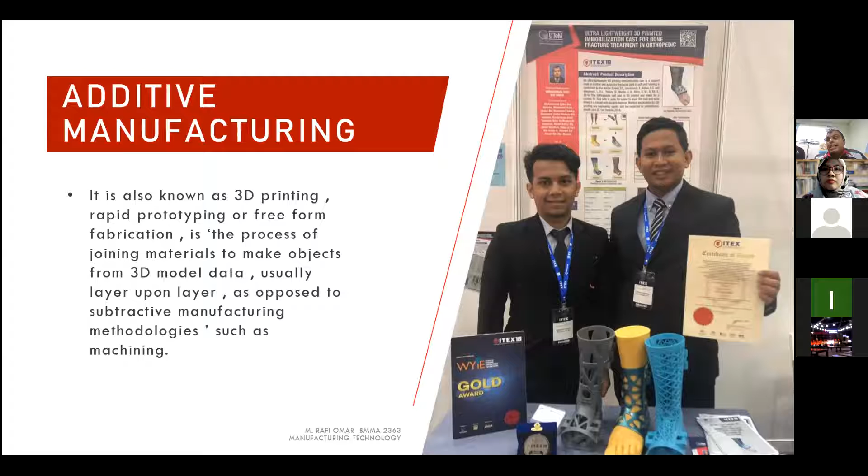At least... Okay, for example, on the right side, this one is actually my student's final year project, which did 3D printing and joined a competition. This product was actually made for a bone fracture to support the arm. This product was actually made from a 3D printer. Which type of 3D printer? Maybe by the end of this class, you'll be able to identify which type of 3D printer my student used. Okay, alright.

Okay, next, the important thing before you go deep into 3D printer is you need to know the definition. As Puan Rohayu said before, rapid prototyping is different from additive manufacturing. However, it is in the same group.

Okay, additive manufacturing. What is the meaning of additive manufacturing? Additive manufacturing refers to the technology to create objects through sequential layering. That means when you print, we have a process: the first layer will join the second layer, then the third layer. That means we call it additive manufacturing.

Rapid prototyping is a technique used for quick fabrication, as a scale model, you need to know scale model, physical part assembly using CAD data, a CAD software. Maybe I'll call on someone, let me look for a name.

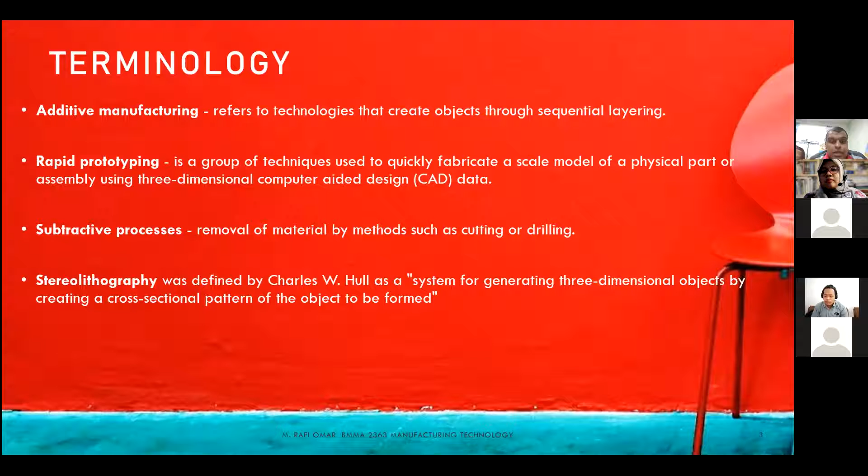Okay, so that is one of the devices used to create rapid prototype. You draw in there and then you generate using a rapid prototype. One more thing you need to know, subtractive process removes material by methods such as cutting and drilling. This one we call using a CNC machine. For example, we want to cut using machining, and this also has the same flow as a 3D printer flow. How to make a part?

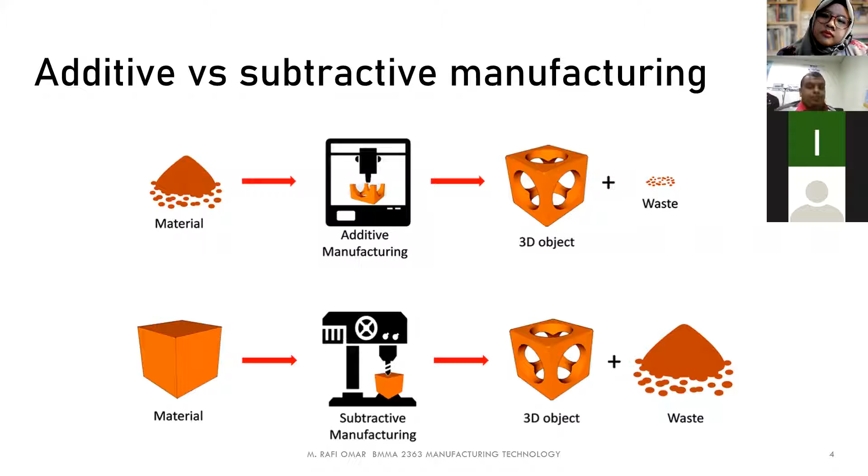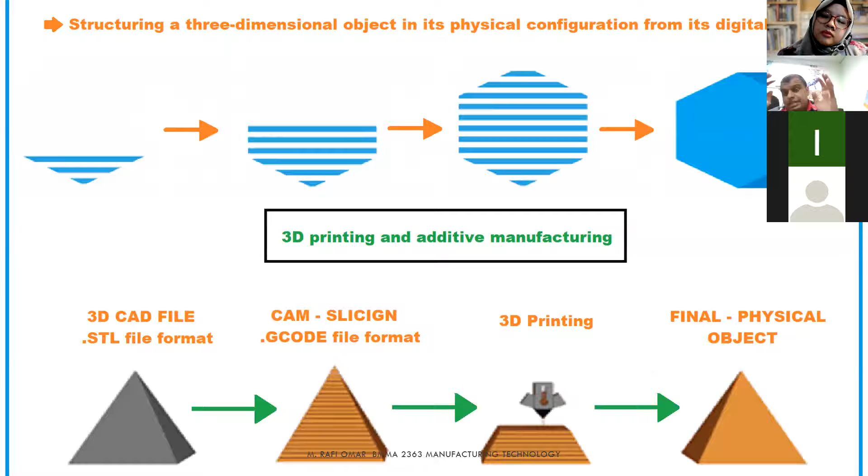Okay, sekejap lagi saya akan demo you all how to structure 3 dimension. From the CAD data, how you want to transfer to the 3D printer or additive manufacturing 3D printer. So I will demo you straight. Maybe I share with CATIA one software.

Okay, for example, we have one part. You all can see my screen, my desktop? Hello, you all can see my desktop? Yes, okay, can see. Okay, if you have any question, you can direct ask me. More easy to share with you all.

Okay, now I open data from the CATIA. For example, I have one part. This one I already modeled in CATIA. And then how do you want to convert this file into a 3D printer file? Okay, first step, any kind of software you use, for example CATIA or SolidWorks. Okay, you already finished modeling your part. For example, this one we call a drone, do you know drone? Ini adalah drone, tempat mounting motor drone.

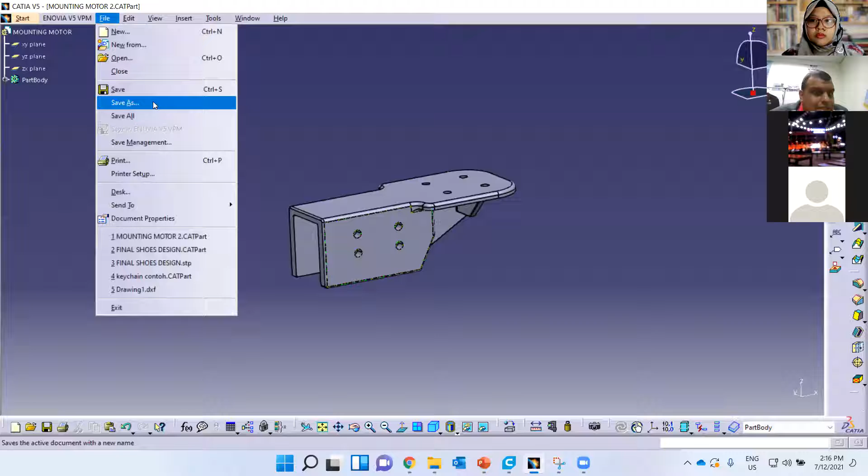Okay, and then how do you want to convert? First step, what you need to do is save as. This part you just go to file and then save as. Okay, basically normally the 3D printer software is able to read data as an STL file. You change to STL file and then you save as.

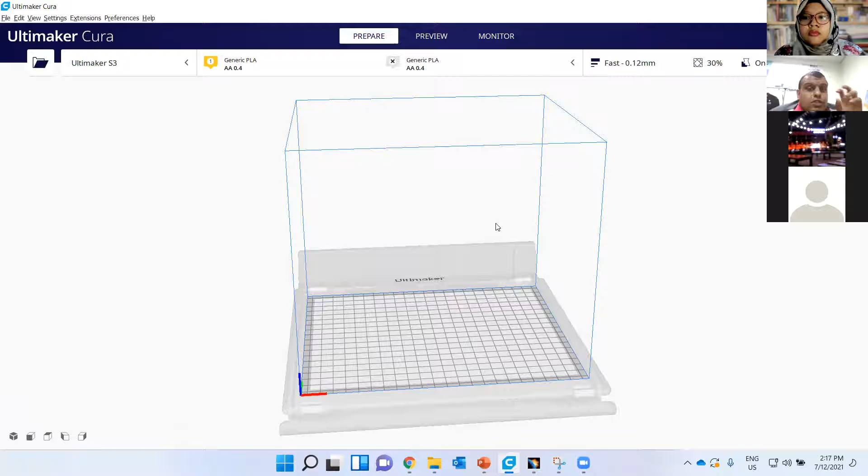And then next step, what you need to do, you need to open the 3D printer software. For example, for today I use a very cheap printer software. This one you can actually buy at your home because the price of a printer in Malaysia is around 800 ringgit until 1,100, very cheap one. For example, for today we use Cura 3D printer. You are also able to download it if you have a 3D printer, or even if you don't have one, because this software is free.

And then you need to insert back your, for example this one, Mounting Motor 3, insert into this software to convert to G-code. For example, the stages: first you have modeling, save as STL, and then the second step you need to do is slicing, to estimate how much material you need to print one part.

We are also able to set the quality of the printer. Actually, this printer works the same as a paper printer. When you look at the printer settings, you can choose a color type, and you can choose very detailed printing. If the printing is detailed, we need more hours compared with rough printing.

This software also lets you resize the part. For example, I need to resize the part until 200%. Okay, bigger. And then you also can choose settings, by default, ready setup.

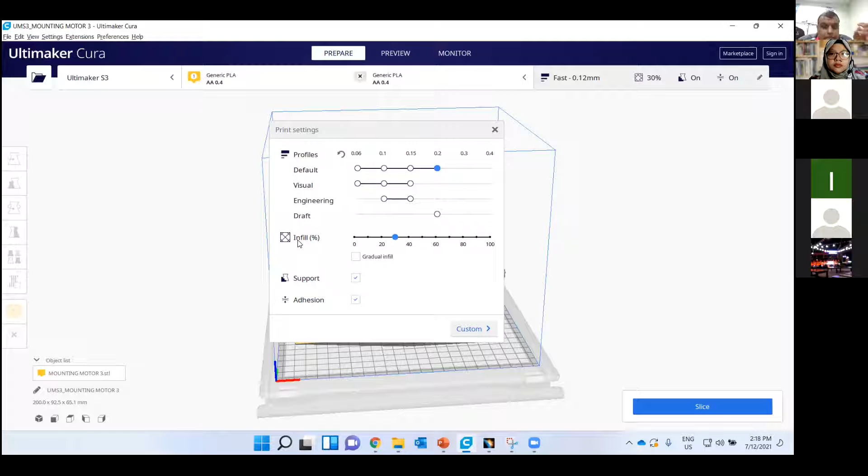We use infill. Infill means the printer spacing between each fill. For example, for this one, we use 30%. Okay, and then I click slicing, and then you can get the result.

How many hours do we take to print this part? For example, this part I need 1 day, 8 hours, 52 minutes using this Ultimaker S3 printer, and the material needed is 298 grams.

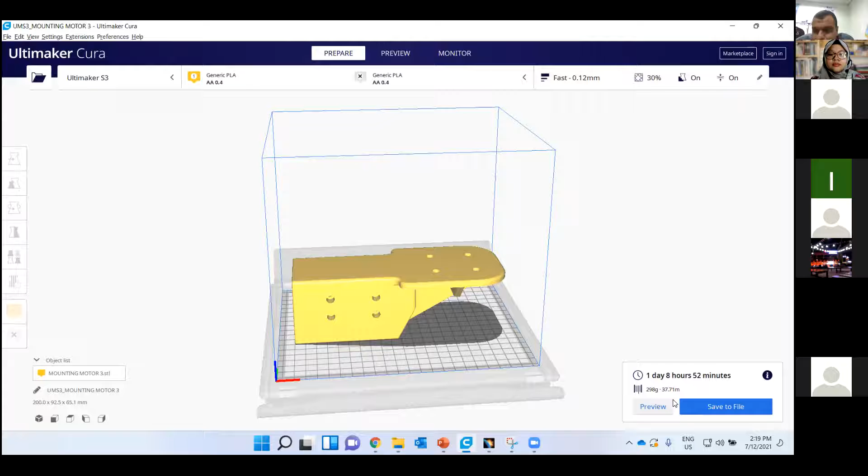For example, if I resize this part to 100%, and then I resize, this process shows how many layers we need, how much time we need, and how much material we need.

When I resize it, only 5 hours 57 minutes. We can also see the simulation of how this printer will run.

For example, I go to preview. Here we can see the simulation, the process from layer 1 until layer 231 to finish this product.

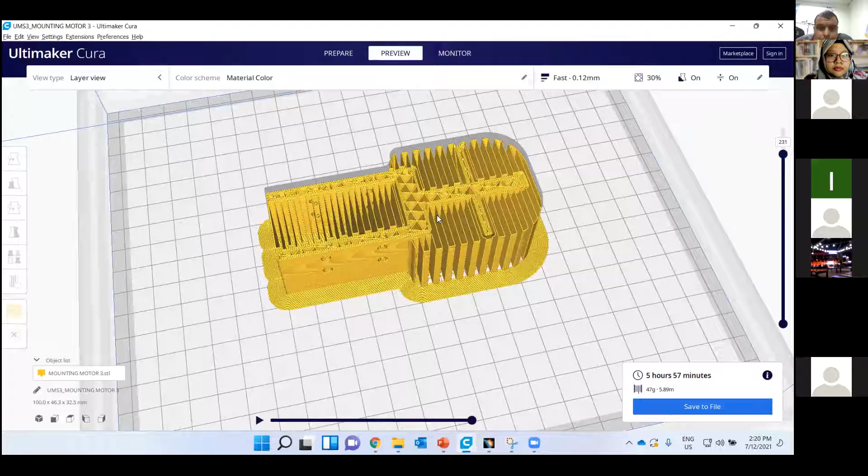You can see inside this part, it's not solid, but it creates a triangle shape. We call this hatching type. When it comes to infill type, if you want to change to a different shape, you can change the infill setting. You can choose which type you want.

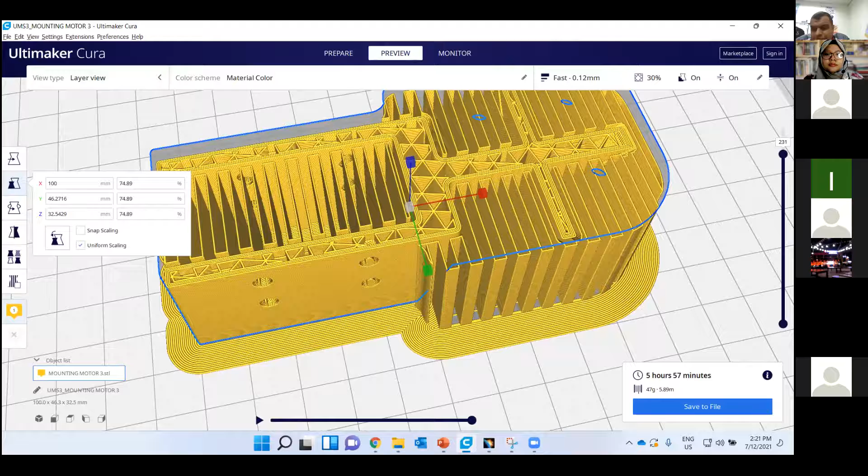Next slide. First step, you have from CATIA, and then you have slicing. Next step, you need to transfer the slicing data, the last slicing data, using this software. You need to save as, save the file, and then send it to the memory card, and the memory card you will put in the 3D printer. This part you will put in the 3D printer.

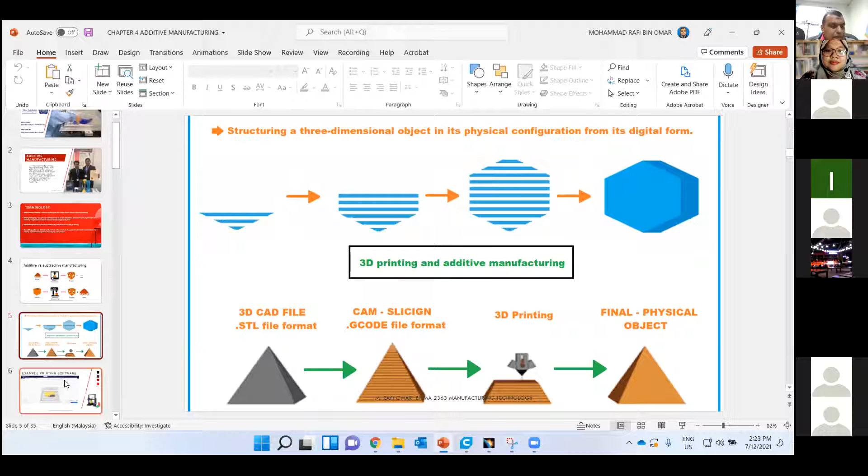Next, we can look at an example. As I demonstrated, we have software for printing, but there are a lot of types of software for printing. You can see in the market, and it depends on the printer type.

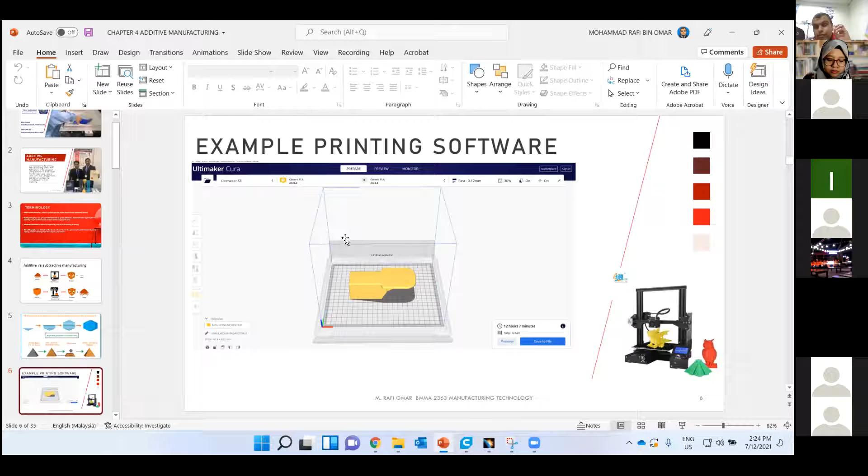For example, the most affordable printer in the world, I think in Malaysia too, we have the Ender type. This is the cheaper printer, and the software is also easy to use. Even if you're not familiar with this software, you'll know how to convert the file, because this software is very simple.

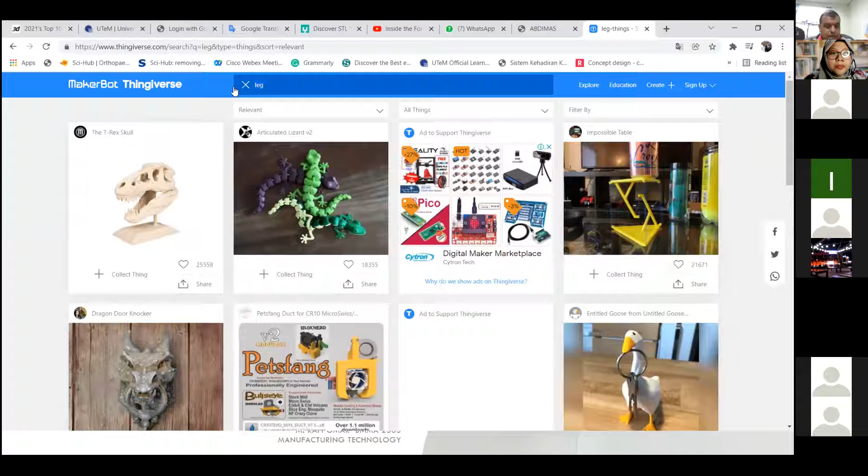For example, if you want a face shield, because during the COVID pandemic a lot of designers became familiar with downloading this kind of face shield design. This one also you can download from a website.

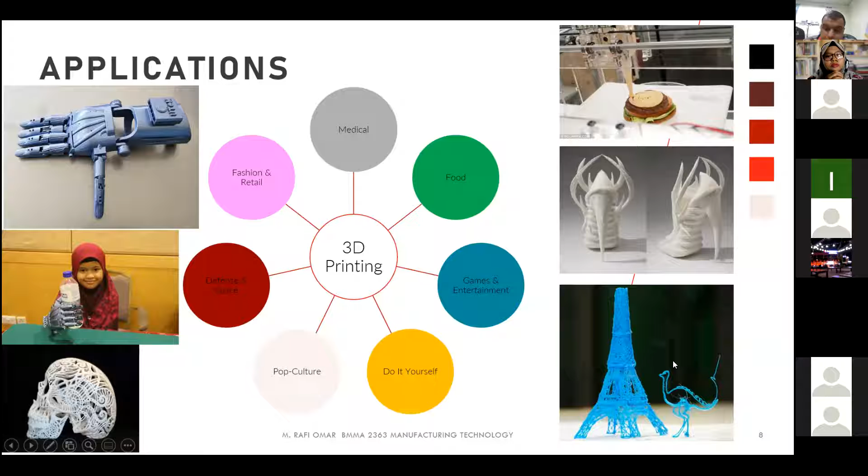And then we have SLA. SLA is similar to SLS, using a laser as the melting agent for the resin and the powder base.

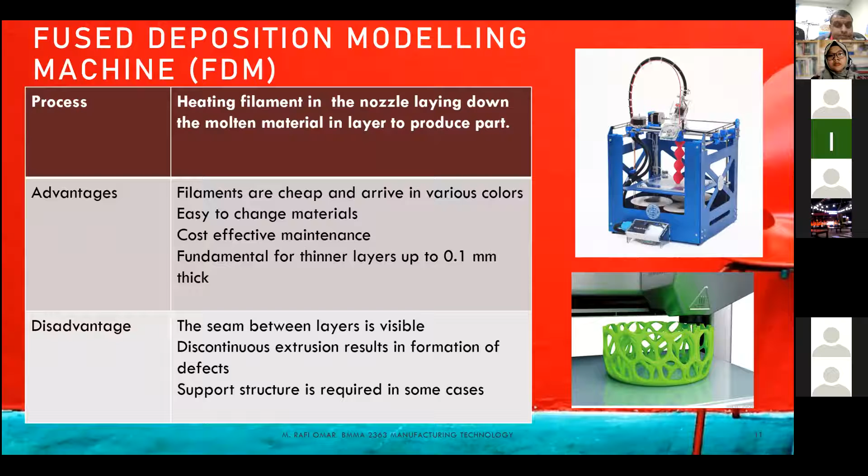Okay, we call it FDM. FDM is Additive Manufacturing Technology, commonly used for modeling, prototyping, and production applications. But actually this printer only produces the part as a prototype only.

And then the model of the part is made with very small bits of material, layer by layer, using thermoplastic filament. When we talk about thermoplastic, that means after the material is already printed, you can crush the part back, and then make filament again. This 3D printer can do that.

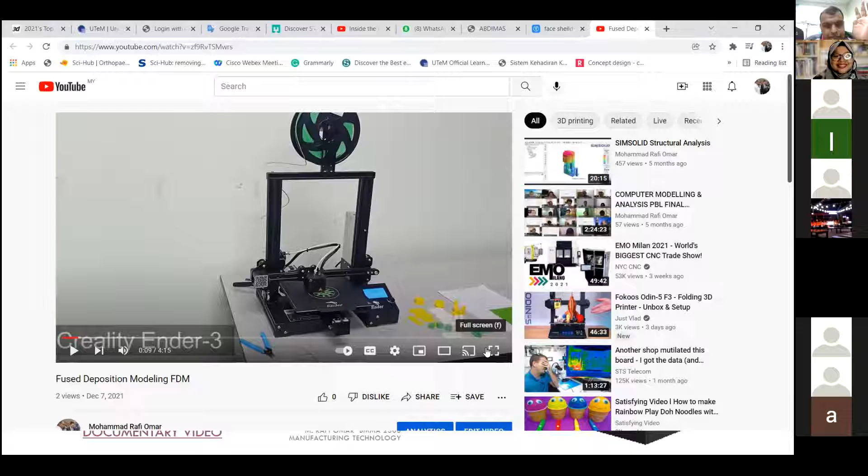Creality Ender-3 3D printer. This 3D printer uses 1.75 filament. That filament will melt using the extruder, and then the filament will print using the coordinates as G-code already generated using Cura software.

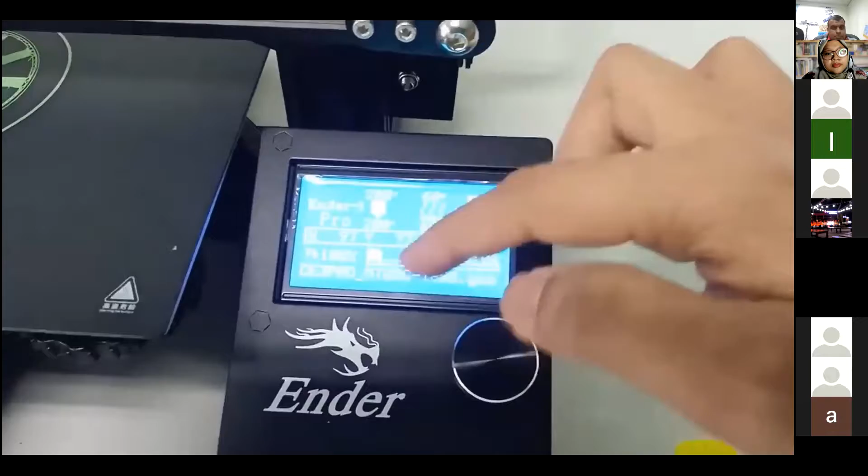Here we can see the process, the part before we start creating it. Maybe the printer will create the support. Here you can also see the temperature for the extruder is 200 degrees, due to the melting point for this material, PLA, and then the platform will also heat up to 60 degrees Celsius.

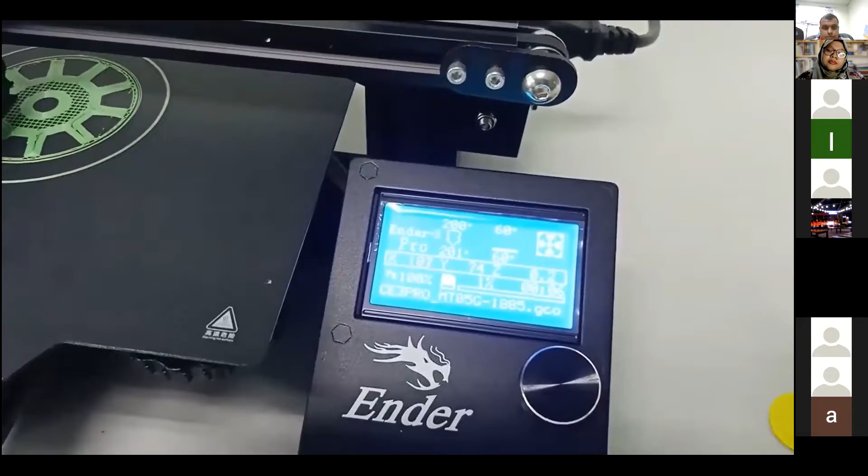Okay, how many hours will this part take to print? Around 1 to 2 hours, because this is a bigger part.

This part is actually very good because we can check the accuracy of the printer, because we create the circle, that is the spot ring. From that we can see if the printer is okay or not. If not okay, maybe we can adjust the belting system in the printer, such as the X-axis, Y-axis, and Z-axis. Okay, that's all from this printer.

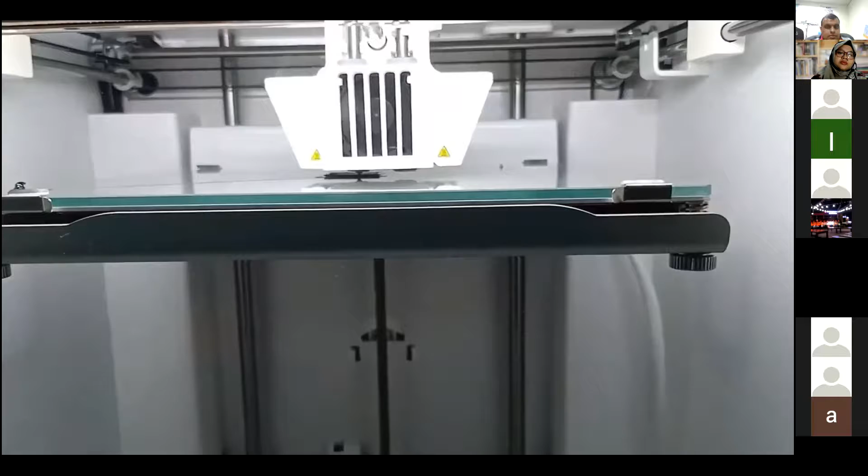Okay, this Ultimaker 3D printer actually has two materials you can insert. The material type is filament. The extrude diameter for this printer is 0.4. You can see the very smooth surface this 3D printer can produce. Ultimaker is good because you can use two materials in the printing process. This is an example of a part already printed, because the surface is very smooth compared with other types of 3D printers.

Okay, you can see, for example, we printed one part, and it needed 48 minutes 50 seconds to finish this part. You can see the very smooth surface this printer produces.

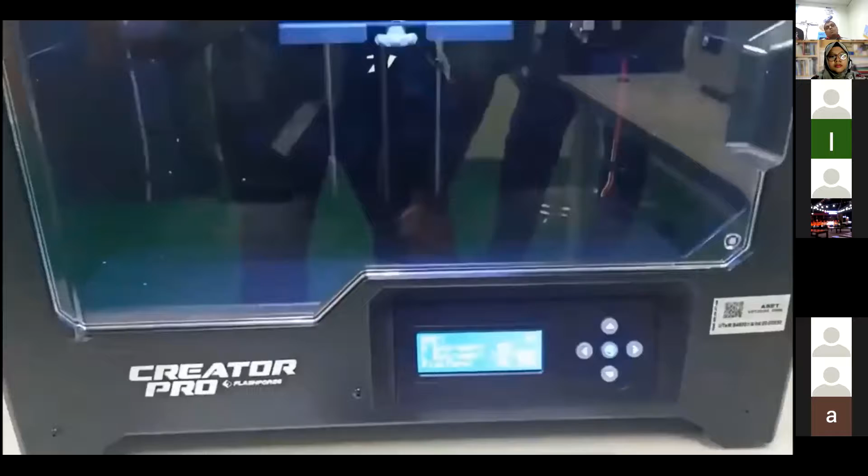Okay, this one is another FDM 3D printer, named the FlashForge Creator Pro 3D printer. This 3D printer is also able to use two materials at the same time. Right now you can see the printer creating a platform to print one of the parts.

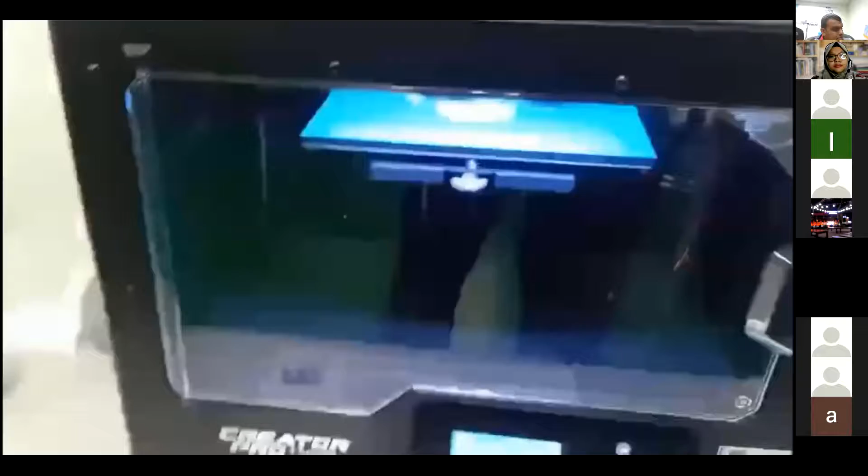We print the architecture part. You can see the part produced by this printer has a very smooth surface, like the Ultimaker 3D printer as well, because this printer is quite good, at a price of around 4K ringgit.

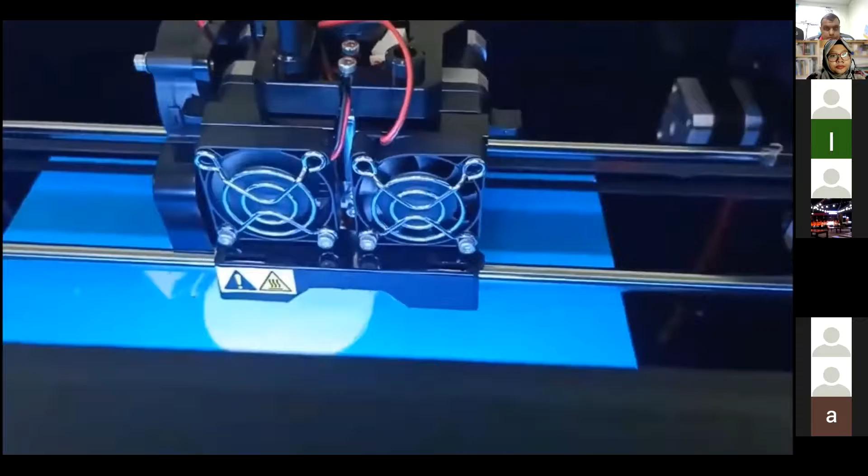Here you can see the printing process: the material will be inserted into the extruder, and then the extruder will melt it onto the platform. Also, the temperature will be set to around 50 degrees Celsius. Okay, this is the printing process.

You can see we have two extruders, left and right, but nowadays we use only one type of material. We put it in the left side, extruder number 1. So you can see now the platform creating the support.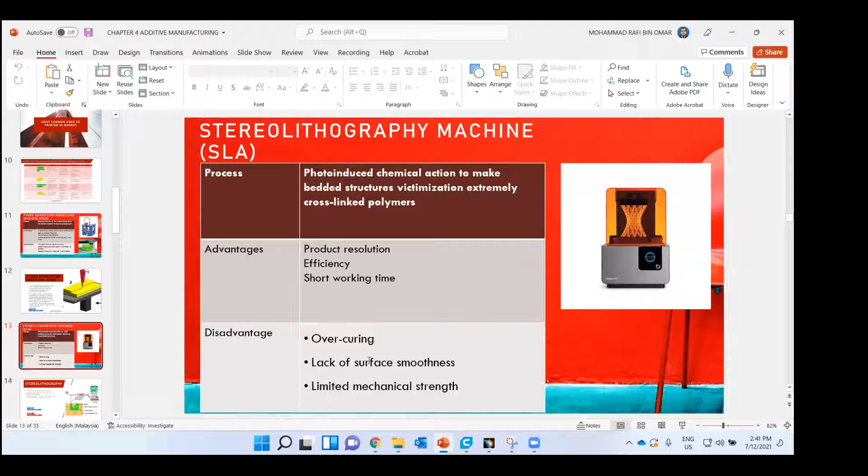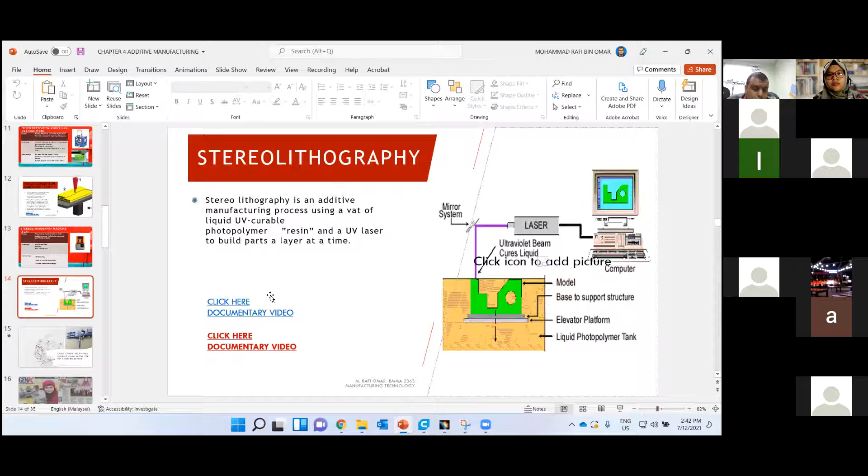The resin will melt and then harden for that part. I will show you a video to make it easier to understand the working concept of SLA 3D printing.

Okay. Yeah, let me turn it on, wait, I'll stop it first.

You can see this 3D printer is different from number one. Number one is filament based, and the filament melts. But this one, the resin melts and then hardens with the surrounding temperature.

When you put the printer in an air-conditioned room, the result and quality is different from when you put the printer at room temperature. It's better to place the printer without air conditioning, because otherwise the temperature is not stable.

Wait, let me choose.

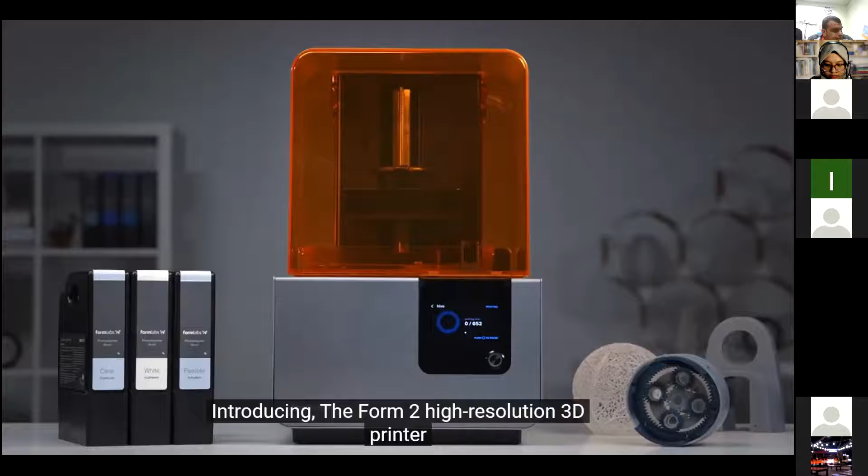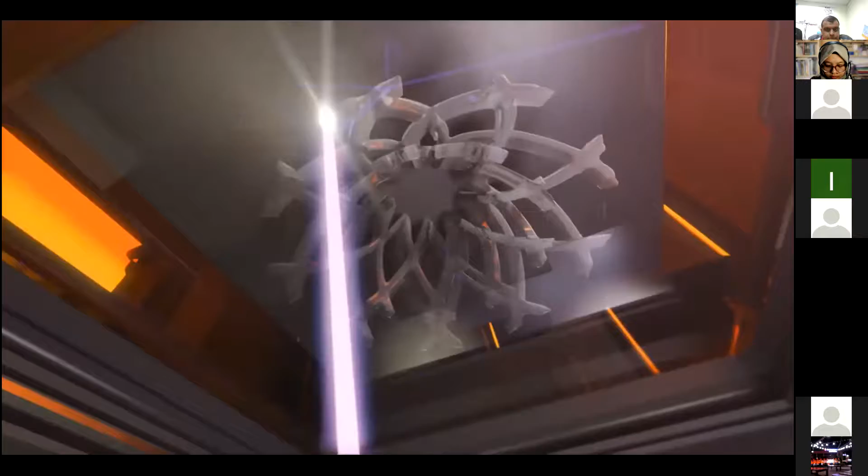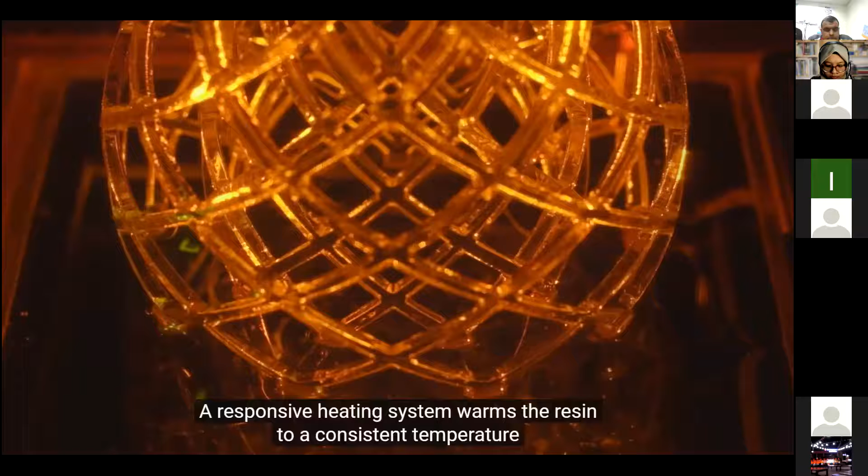We asked ourselves, how could we create the most powerful, most reliable 3D printer designed for the desktop? Introducing the Form 2 high-resolution 3D printer. It starts at the heart of the machine, the optical engine. A high-powered laser is guided by custom galvanometers, creating each layer with exceptional detail. A sliding peel mechanism gently removes the part from the print bed, while a wiper glides across the optical window. A responsive heating system warms the resin to a consistent temperature. This creates a reliable print process, producing beautiful parts without sacrificing speed.

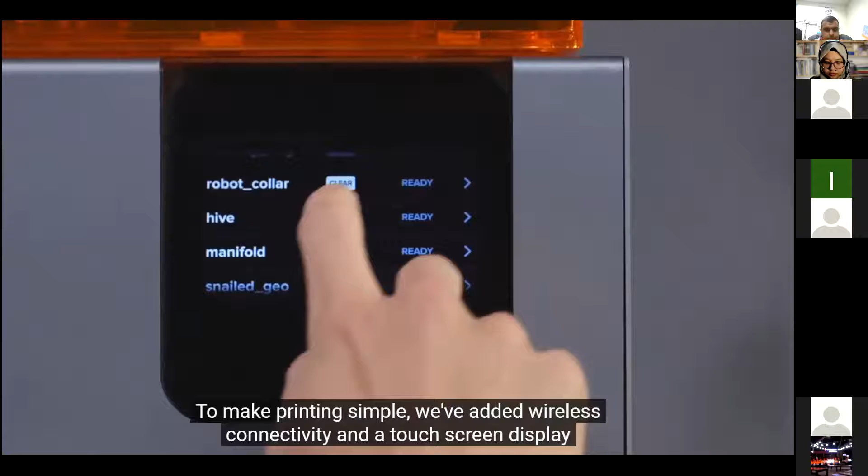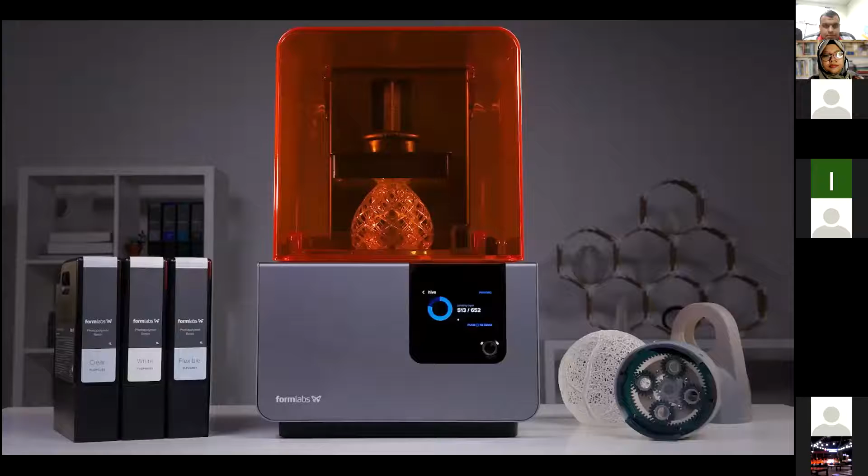It features a 40% larger build volume and a new smart resin system that automatically refills the tank when levels are low. To make printing simple, we've added wireless connectivity and a touchscreen display. Now you can upload over Wi-Fi, manage your queue, and receive notifications when your print is complete. All this has been designed to work together with our world-class software and cutting-edge materials to deliver professional results. The Form 2, the most advanced desktop 3D printer ever created.

Hello, testing 1, 2, 3. Testing. Hello, can you hear? Okay, can you hear? Okay.

Next, we proceed. We actually have three most common types used. First FDM, second SLA, because SLA has an expensive price. The price for this printer is around 20,000 to 24,100 ringgit Malaysia for one printer of this type, because the material produces a transparent result.

Next, maybe we can see one case study, a 3D printer product created by my team partner from UTeM to make a better life for a disabled person.

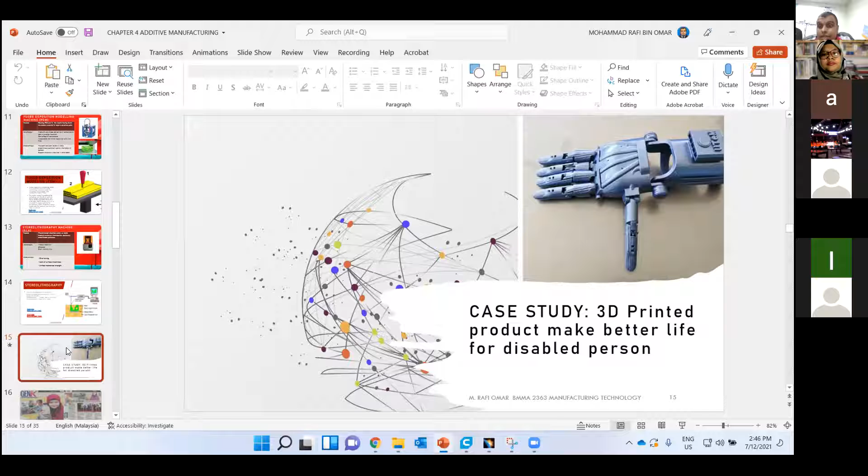For example, in this case study, we have Adik Umaira. This girl does not have fingers, disabled from birth. We tried to solve her problem. You can see here - we were able to solve the problem by making a prosthetic hand.

Actually, this prosthetic hand design, you are able to download it - I've given the link from the Thingiverse website or elsewhere. You can download it and then help the community of people without fingers. You can also see it was featured in the newspaper.

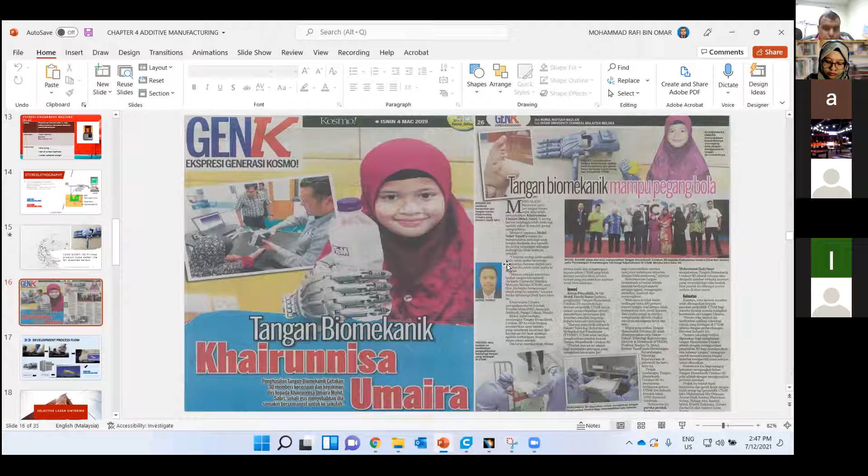Next we can see the process of how we made this product. First, we consulted with a university doctor to check whether this printer material is good for skin or not, and confirmed it does not have an effect on the skin.

Then we brought Adik Umaira to University of Technical Malaysia Melaka, and we did a 3D scan. Then I, as the team designer, designed the prosthetic hand.

As I show here, we made two versions - one I gave to Adik Umaira, one simpler one for myself. Then we ran a simulation to check whether this prosthetic hand functions properly or not.

And then we printed it using a 3D printer with selective laser sintering. Maybe I can show you a simple video, just 1 minute.

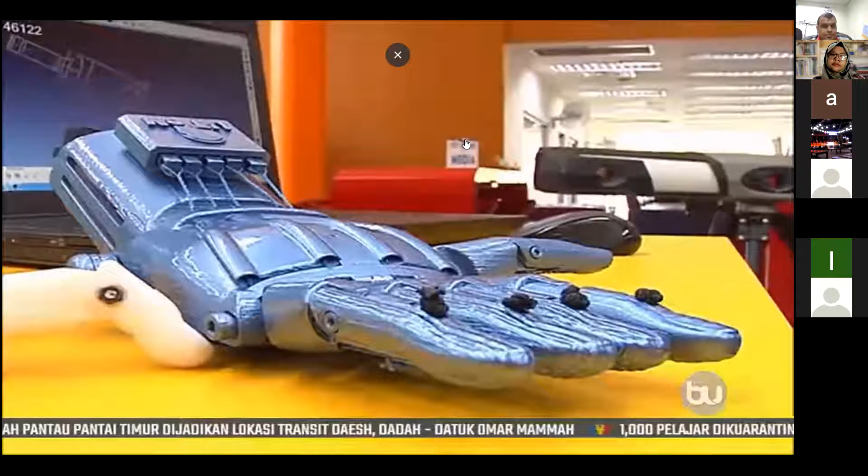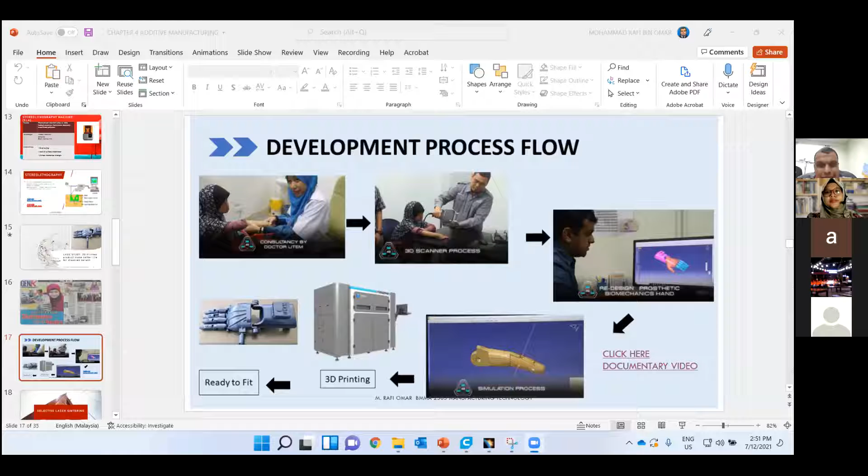Hello, testing 1, 2, 3, dengar tak? Dengar Ustaz. Okay, mungkin kita boleh rehat 10 minit boleh? Pukul 3 kita start balik. Bagi saya 10 minit boleh. Rest for 10 minutes. Boleh Puan Rohayu? Ya, silakan. Kita sambung pukul 3, bagi saya 10 minit, pasal kita ada lagi 10 slide yang actually quite detail, macam mana kita kira. Okay, maybe saya bagi 10 minit dulu, saya tutup kamera dulu.

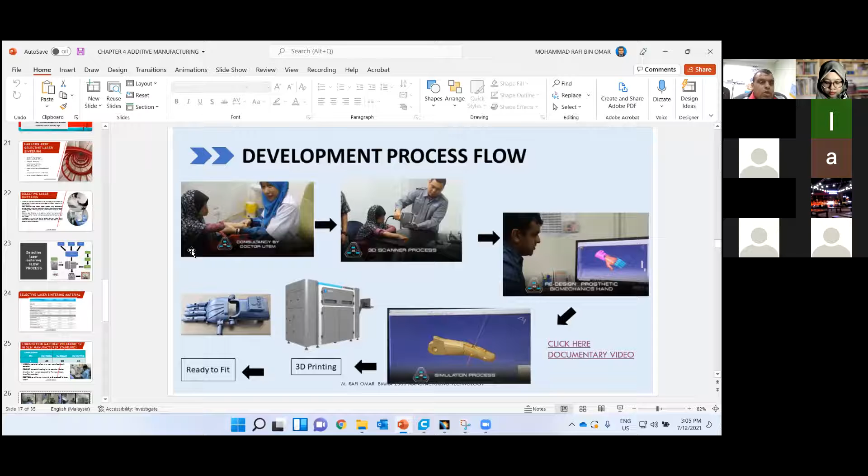Next we go to the specific 3D printer, because I think you're not familiar with this. At UTEM we have this kind of facility, a very big 3D printer for industry. We call this 3D printer a selective laser sintering 3D printer.

Maybe I won't go deep in this chapter, I'll just give you a rough briefing so you know. For my class, maybe I'll go deep because it relates to the final exam question.

This 3D printer, selective laser sintering, is an additive manufacturing technology for 3D printing by melting. Before that, you can see the filament type, but this printer uses a powder-based material. The powder size for this printer is around 50 to 80 microns, a very small particle powder. That powder's name is polyamide 12, or nylon.

Okay, you can see at the right side the diagram for the inside of the 3D printer. We have 4 chambers. First we call feeder, that means the place we put in raw material, and then we have a build chamber, and then we have a powder collector, and also an overflow chamber.

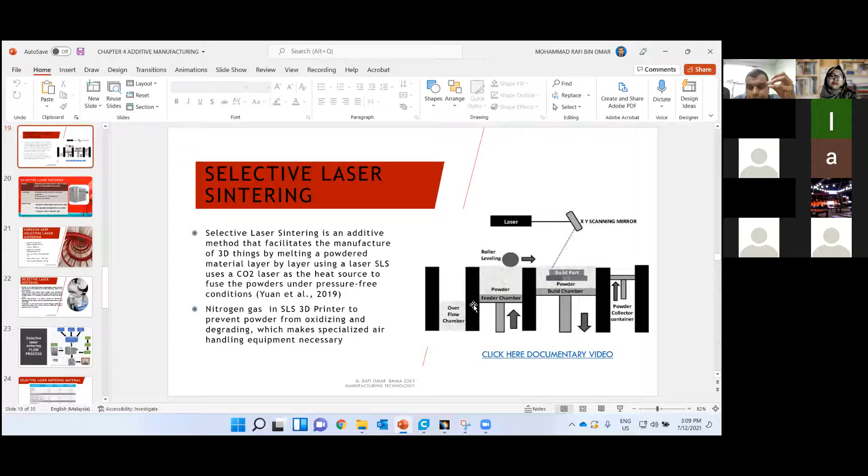Okay, overflow chamber, you can see here. From this chamber, because this material did not get the laser beam power. Okay, and then you can see, and then we have nitrogen generator.

Okay, input STL file, same as before when I taught you using Cura software. This machine also has its own software, we call it Buildstar, because this machine is made from China. We need to make arrangements, put the data into the machine, and then from there we need to take out the part from the machine, clean the part, and then the part will be separated from the recycled material.

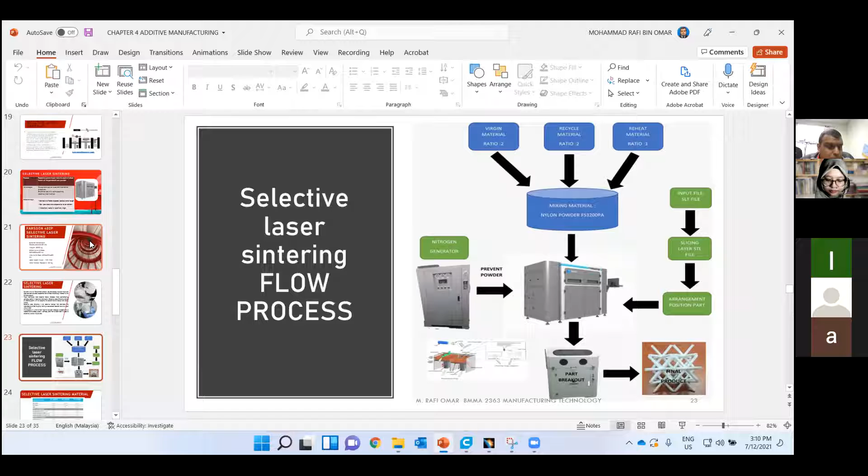Alright, the working concept you can see as the diagram I showed before. Maybe we can proceed. Okay, because this printer is a very special printer, we can print very big parts in the 3D printer category, that is 400 mm by 400 by 400, which is bigger in the 3D printer category.

Basically, the 3D printer size for FDM is around 220, with height maybe 180 only, because this machine is an industry machine. Okay, maybe we can go to the process.

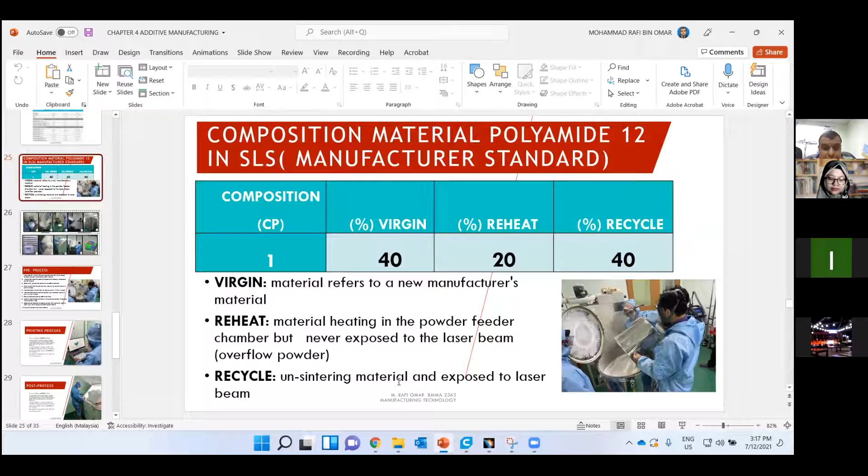And then the last one we call recycled powder, which is unsintered material exposed to laser beam. This powder, in the cake, we call recycled material.

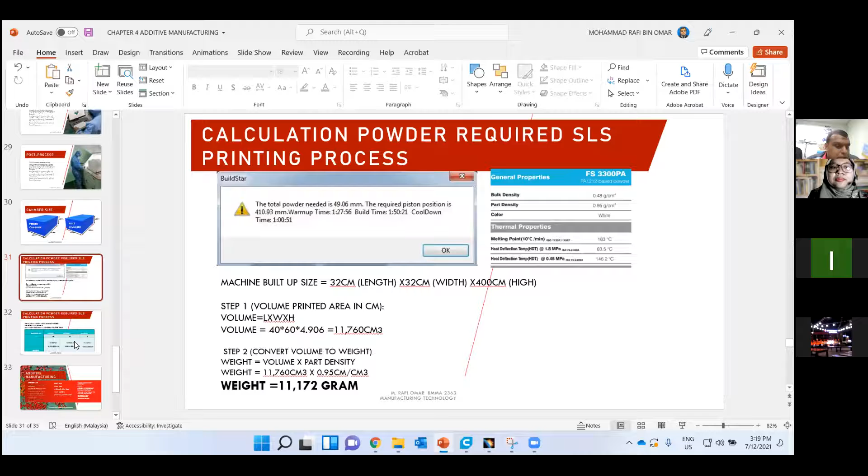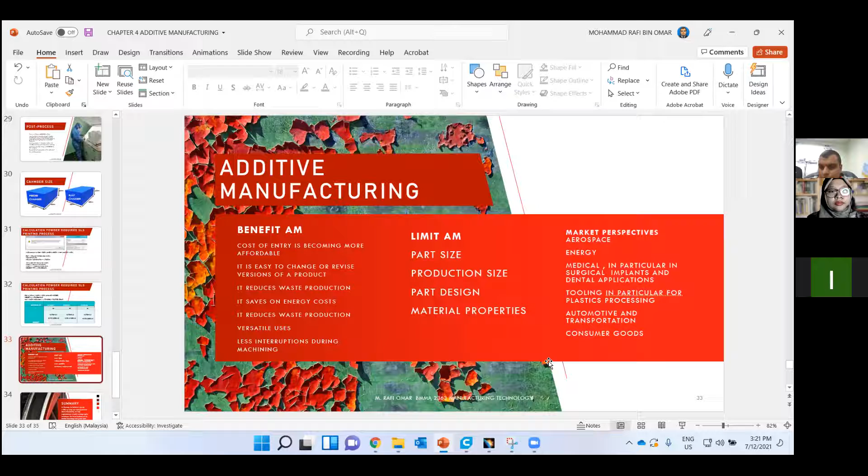Market perspective: in aerospace it's already used, but not many parts, only some. In medical, as I showed before, we have implant surgery and dental applications. In tooling, it's practical for plastic processing, automotive and transportation also have it, and consumer goods too.

Okay, at the summary - this one. That's all for me. Any questions? Maybe before we close this session, any questions?